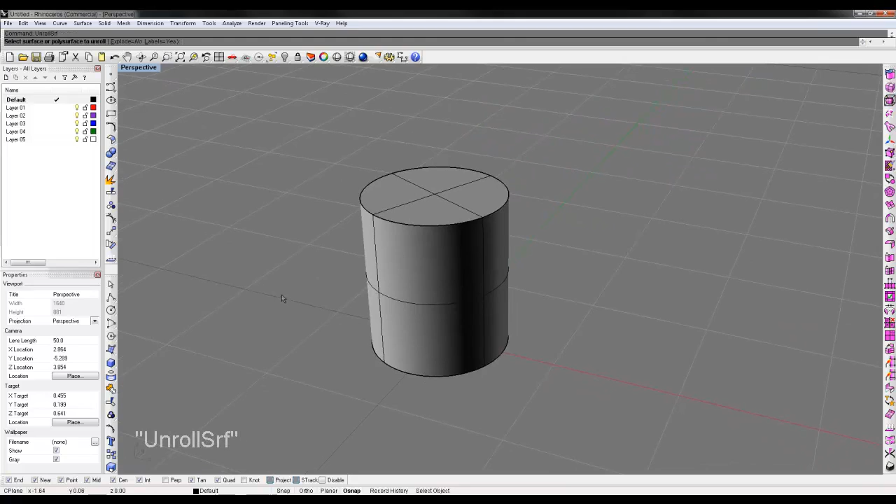figure. This is really similar to if you've ever looked at packaging die lines where you have a three-dimensional form and you kind of want to flatten it out. So let's take a look. So here I have a cylinder, and I'm going to first do this with the unroll surface command. That command is UnrollSrf, and I'm going to select my polysurface and hit enter a couple of times.

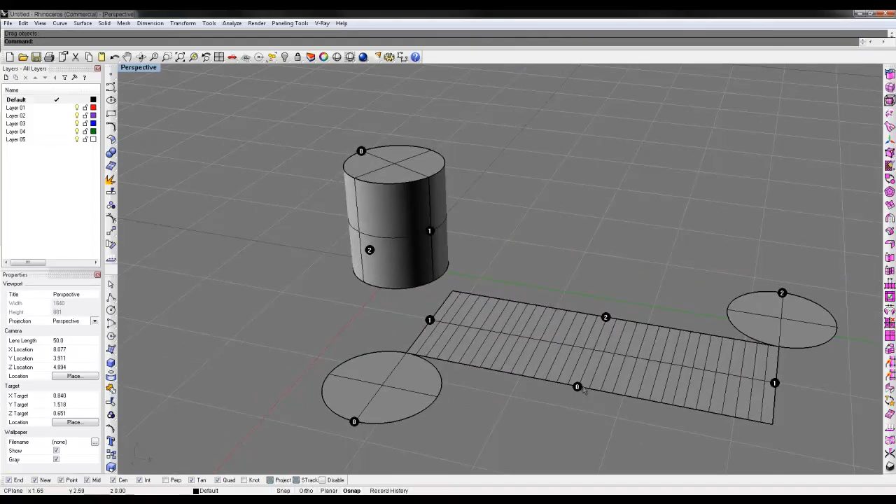And I have my labels turned on, but you can see what happened. It just unrolled the surface, leaving all the parts intact, and it's even given me labels. Now I have the labels selected as on, so you can see where each seam is. So 0 corresponds with 0, 1 with 1, and 2 with 2. And this is really cool if you want to print something out and then reassemble it.

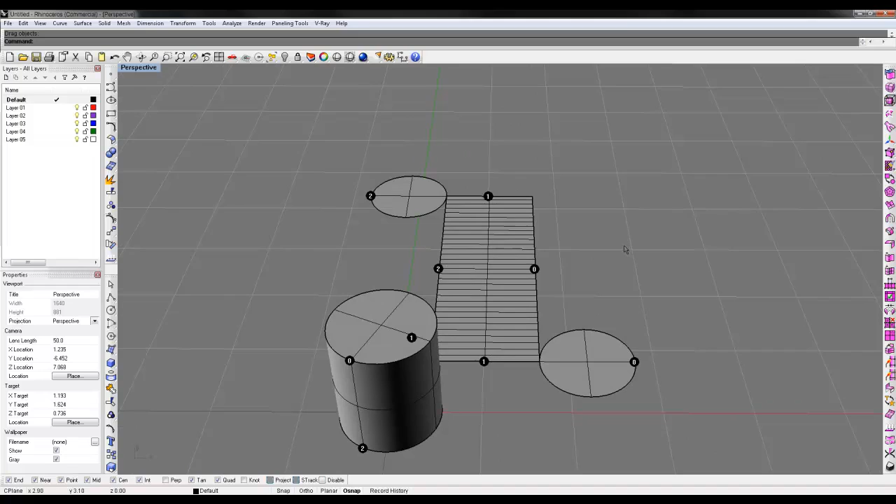Now keep in mind you'd probably have to add some tabs on here if you wanted to cut this out and glue it back together, but it's a really useful segue into something we're going to get into in a few weeks called UV mapping, which explains how an image can be wrapped around a surface. So anyway, without getting distracted by that, that's one way to unroll a surface.

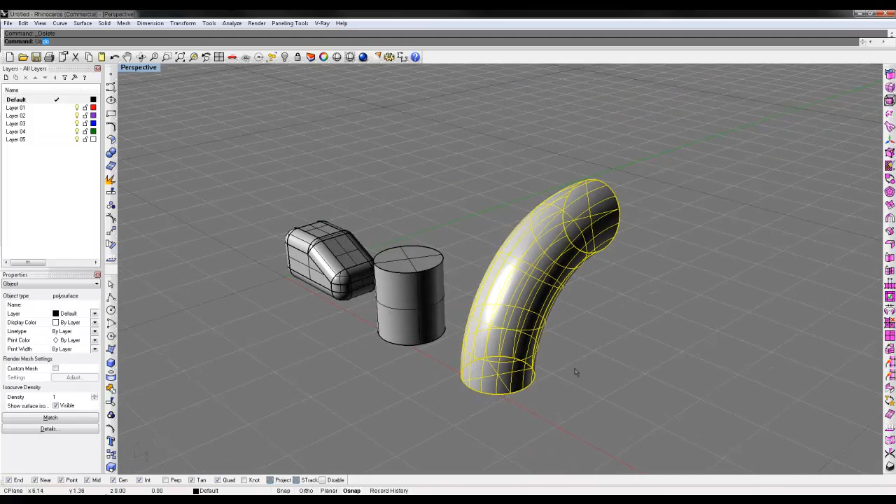Another cool tool that's kind of specific to Rhino, but there are lots of programs that do this specifically for image mapping purposes. This one's called Smash. And the reason it's useful is if I were to try to use the unroll surface command on this shape right here, it's not going to work. And here's why. The unroll surface command works great with things that don't have compound curves. Now, because this form bends both on the z-axis and the y-axis, so you have a shorter arc here and a longer one here, the unroll surface command doesn't exactly know what to do with that surface.

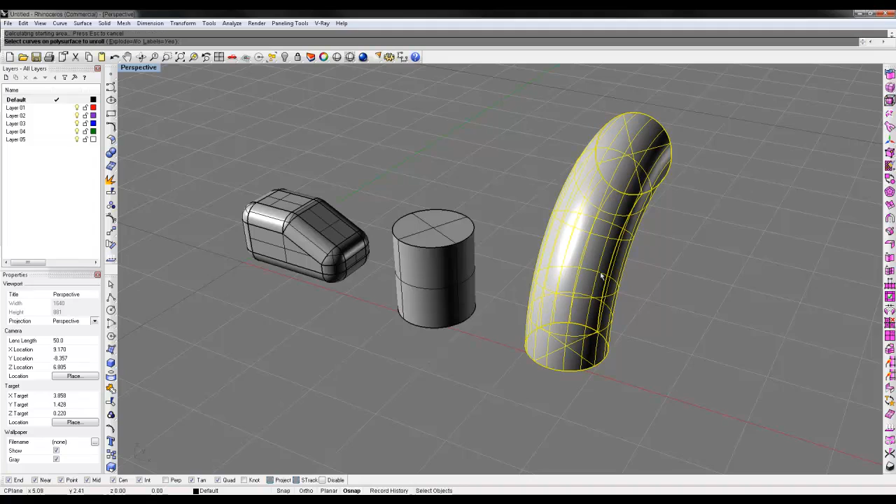So this is why I use the Smash command, which is sort of a more advanced version of the unroll, where you're just selecting your form, hitting enter and hitting enter again. And what that's going to do is give you the same sort of thing, only it's taken into account the whole unrolling of that surface. Now if I were to try to assemble this, I would just print this out and I would tape 1 to 1, 0 to 0, and 2 to 2.

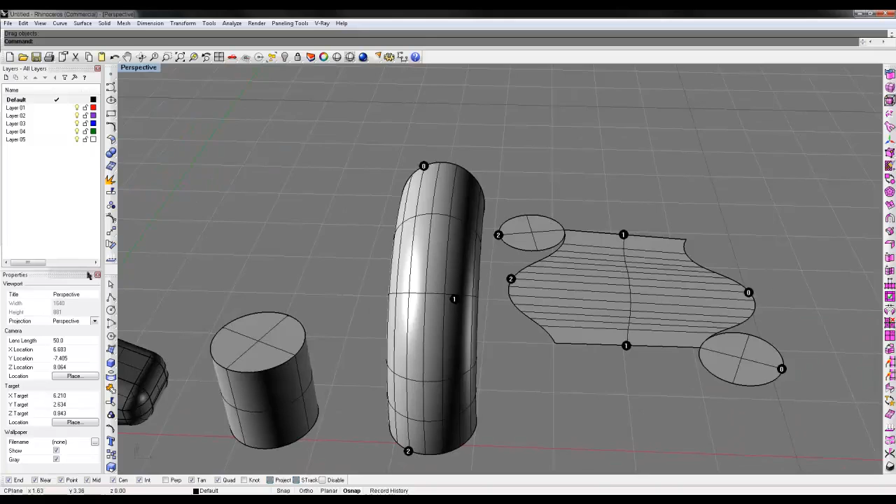But again, it's not taking tabs into consideration, so that's something you'd have to build out. So for example, with this form, because I know 1 is going to go with 1, I might just put a little tab on here. Then now 1 can be glued to 1, and you would just repeat that with the other two sides. So if I were to take this, I can actually print out that viewport, and now you can see I can just take this and print it out.

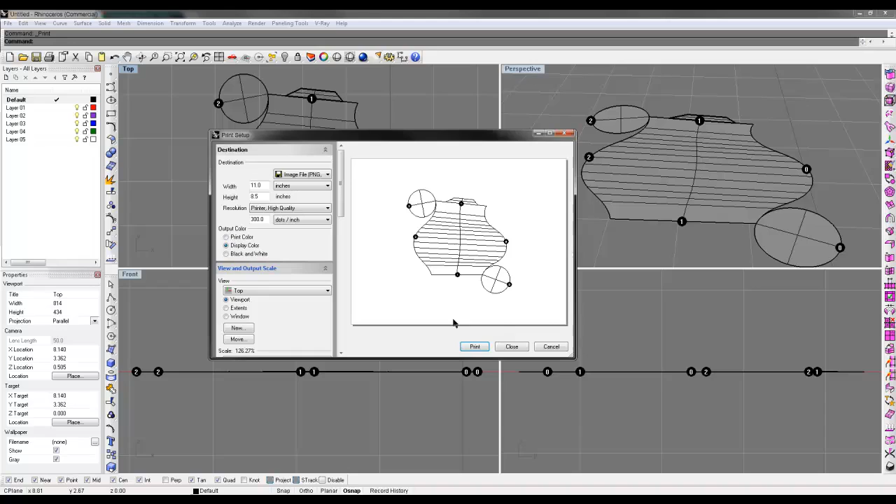Now the other thing I could do is take this into Photoshop, illustrate on it, staying within the lines, and then print it out, and then you'd have some color that you could put on your form. The other form that I have in here is a little more complicated. All these corners are compound curves, so let's see how the Smash tool works with that. So I'll type Smash, hit enter again.

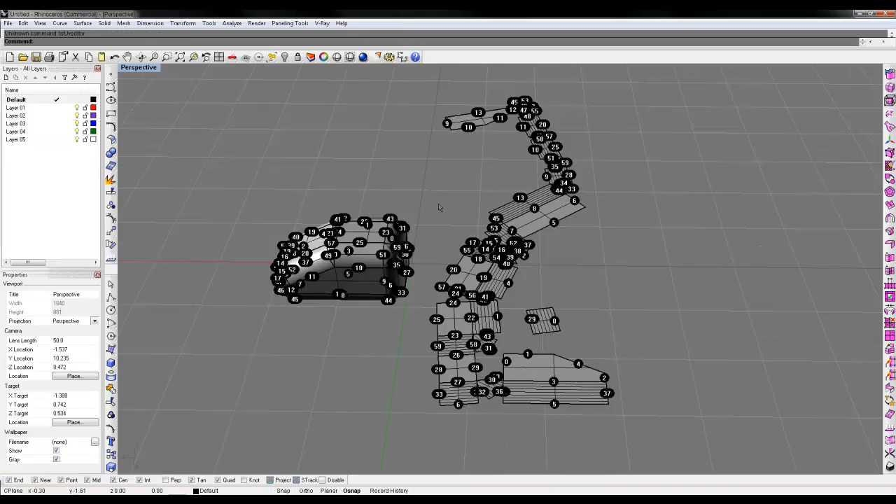This is great. So although this example might be a little bit on the complicated side, the overall idea remains the same. You're taking your model and unwrapping it so you can see it in 2 dimensions, and then take that and bring it into Illustrator or Photoshop and either print it out or paint on top of it and then print it out and reassemble it. But I just want to show you guys this pretty interesting method for flattening your object and actually being able to bring it into 3D space in lieu of a 3D printer.